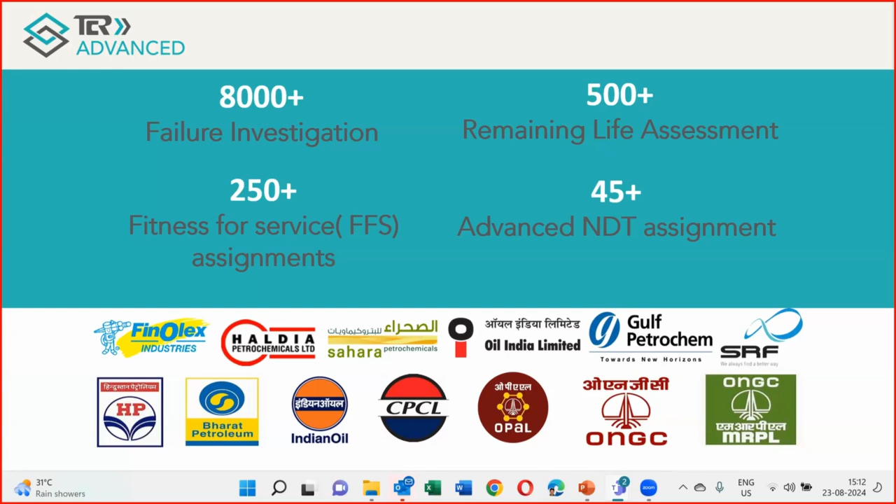Unfortunately, the RLA is more focused on the condition and what is the remaining life. But what are the points which we learn for operational aspect, which is missing in the requirement? I appeal to all the people listening to this webinar that this is a great opportunity to ensure whether your boilers have been operated properly or not, rather than only looking at cracks and thickness loss. So this is a new point we would like to highlight to industry - how an operational interface is possible to identify through investigation and testing approach.

So we can improve the reliability of the boiler through the RLA approach. We all know that profits are always linked to reliability. When your plants are not having problems, whatever time you operate, it turns into profits. It is necessary to maintain units online to be profitable, which is equally true.

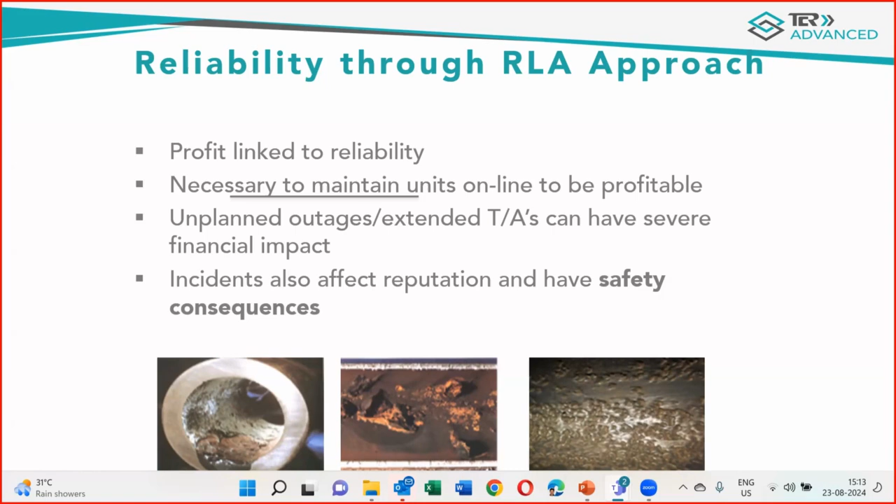Then, unplanned outages and extended turnarounds can have severe financial impact, which incidents also affect reputation and have safety consequences. So people want to avoid any untoward incidents, but these are important points which can be taken as a benefit from a proper RLA study.

So having said this, we would like to indicate that the world has gathered knowledge by learning from different incidents which have occurred. I've kept a few incidents just to set the tone of this talk. We all know that the Titanic ship failed - it struck an iceberg and a brittle failure occurred. At that time, the engineering fraternity came to know that materials become brittle at low temperature.

Similarly, tank failures, bridge failures, high temperature pipeline failures, boiler explosions are things which have put all the regulations in place in the world. So those are the things which teach the entire world.

Similarly, past incidents and records are something which we need to keep in our plant. These are the basis for improvement. Now, whenever I go to do RLA of boilers in different companies, nobody provides the past failure reports, because everybody thinks RLA is done because of compulsion and not as an opportunity.

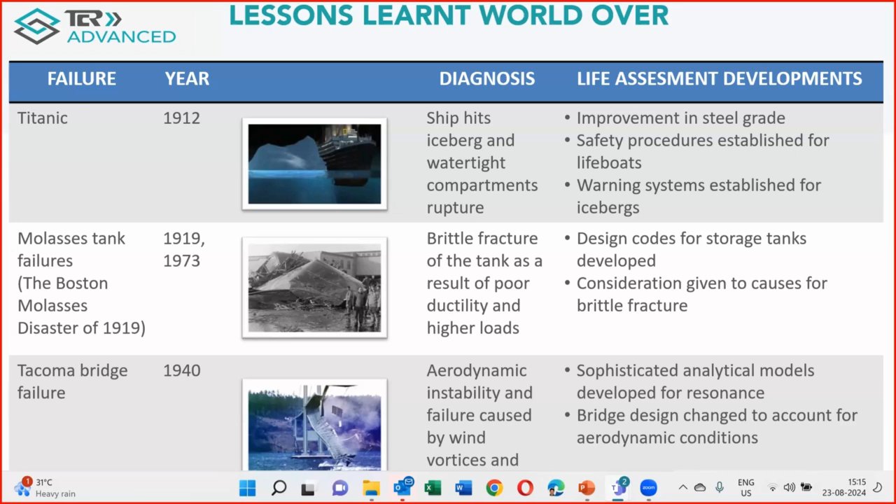When you engage any remaining life assessment agency, it is very important for you to give them all the information and data on where the boilers had problems in the past, because failures are the only thing on which the entire engineering judgment and assessments have been made for better product, better operation, and better learnings have been derived. So this is something we need to understand - when you do RLA, please provide all the necessary information.

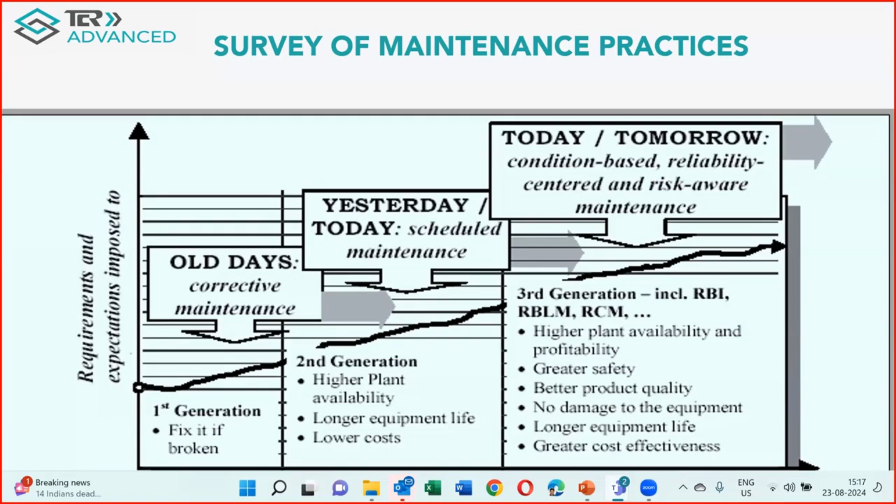Having said this, we need to have a database as the key factor. If you feel your boiler has a unique problem, the same boiler in another company may not have that problem, but yours does. So every boiler has unique operating systems, and in those conditions, the database of prior failure history becomes important. If you have analyzed any failure through a third party, those reports should be provided to all the inspection agencies. Then, what are the life limiting factors of boilers?

The life limiting factors of boilers are material defects, fabrication practices, stress, stress concentration, and stress intensity. Temperature is a huge problem in boilers because the entire design of the boiler is done based on temperature exchange, basically heat exchange. One fluid goes inside and comes out as steam, that is water, and the entire process is nothing but a temperature and pressure-wise balance.

Then you naturally have thermal and mechanical fatigue cycles, because there is flow as well as temperature fluctuation. Then there are corrosion concerns, and improper maintenance and operation inspection. These are also major aspects.

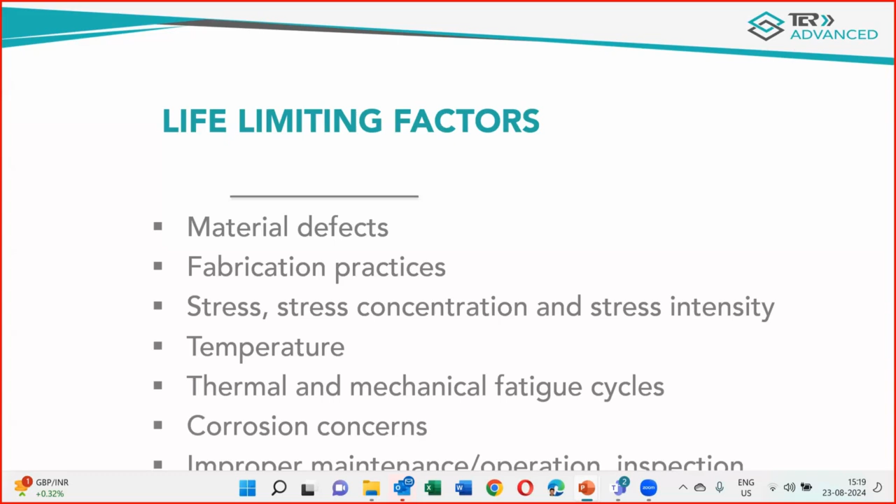So, when we say that the basis of life assessment is the problems you have faced plus the present condition of your boiler, we place a lot of importance on failure samples from the same boiler. We consider that whatever tube failure occurs in the boiler, it is an effect and not the cause. So when you identify the effect, the root cause is lying somewhere else.

So minimizing or eliminating tube failure in India, like the rest of the world, represents a significant opportunity. In fact, today we receive about 20 to 25 boiler tube failure samples a month, which clearly indicates a huge gap, because I'm sure only 5%, or maybe 2%, of tubes are coming to me for investigation from the whole country.

Having said this, there is huge potential to prevent this, and our remaining life assessment is a great opportunity to address these issues. According to EPRI, power generation through fossil fuel incurs 3% generation loss due to tube failure. India produces around 250 to 260 gigawatts of power; suppose 3%, that's about 10 gigawatts.

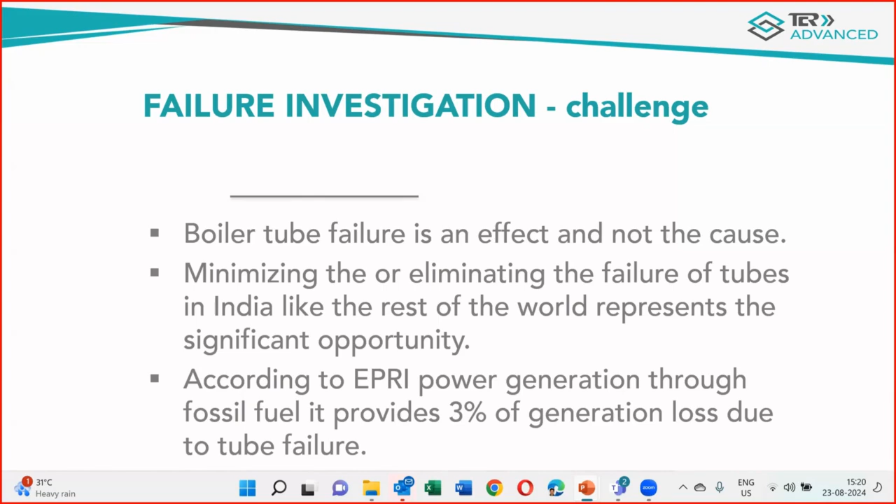Now, 10 gigawatts is what? It may be the power generation requirement of a small country anywhere in the world. That much loss we incur just because of failure. So RLA provides a great opportunity to ensure that even if we reduce this by 1% or 1.5%, we are doing a huge service to the country.

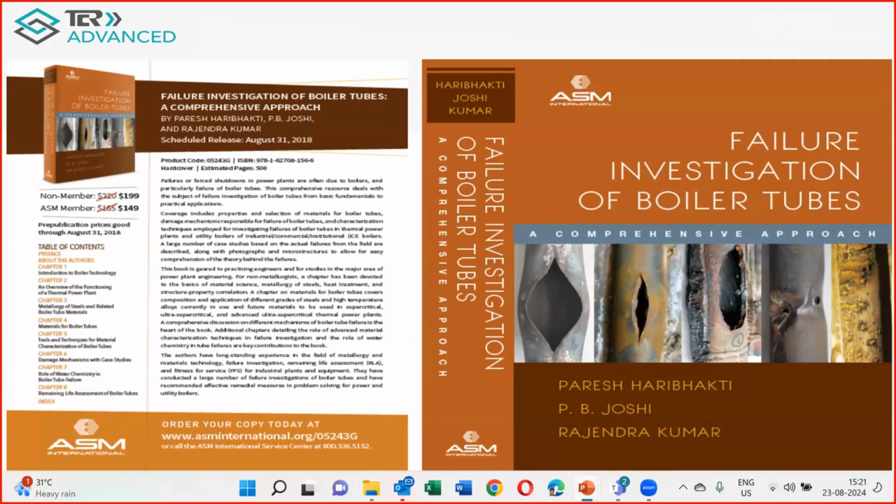TCR Advanced always believes in sharing knowledge. This is a book published by the American Society for Metals, Failure Investigation of Boiler Tubes, which has a lot of case studies and tube failure information. I recommend all boiler people go through this book, as it gives a lot of information on damage mechanisms.

Now, when we talk about damage mechanisms, it is said that in a boiler there are 36 damage mechanisms which are operating. Now, boiler RLA guidelines provided.

Can I request you to put on mute, sir? Thank you. Sir, you're in mute mode. Sir, you're in mute mode. Okay, let me check. Okay, am I audible now? Yes, sir, yeah.

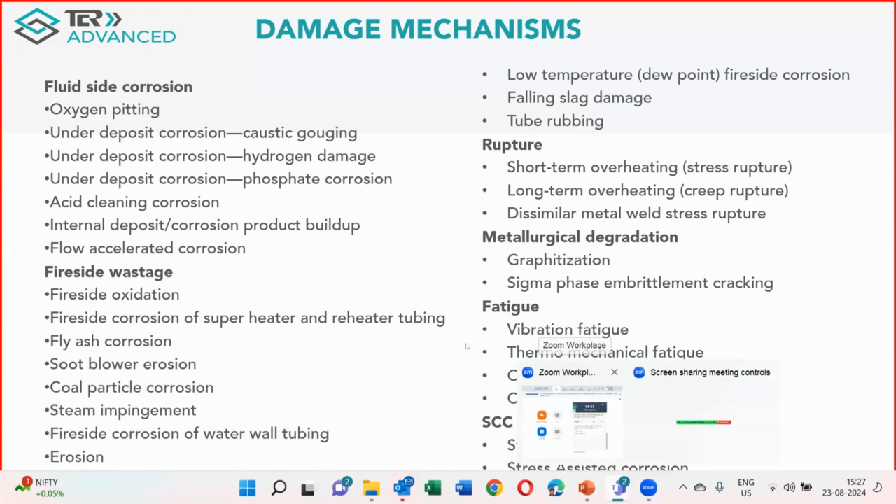Now this is a very important aspect. You need to understand four parameters to understand the entire boiler. One is basically stress - the design of the entire boiler is done based on stress. The other is temperature. The other is corrosion, for which you do all the water treatment.

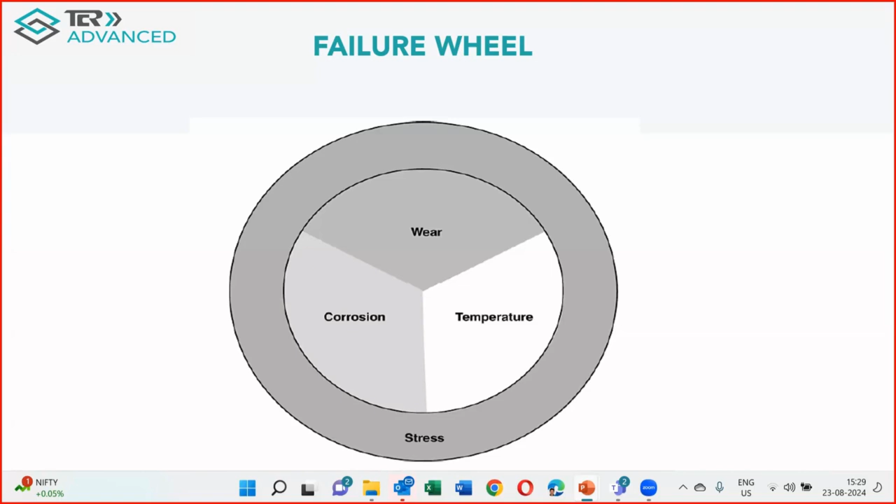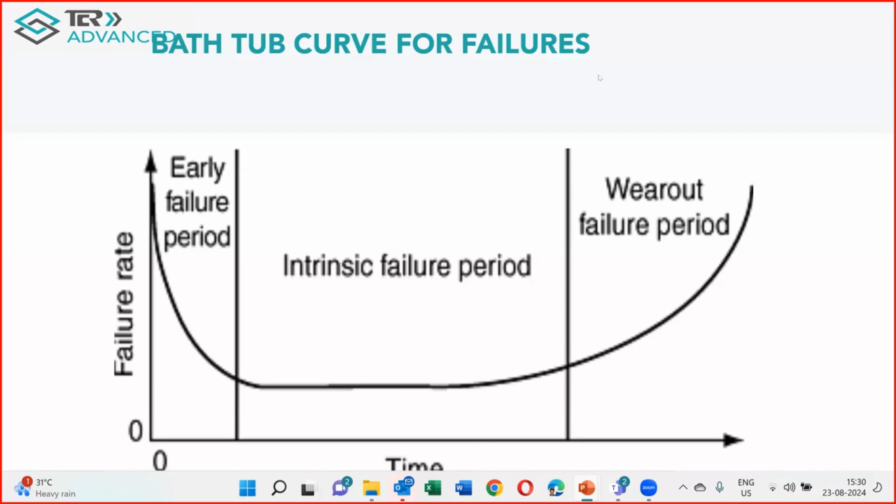Now this magnetite layer is important to understand. In India, we have not looked inside the magnetite layer. I'm very keen to do the characterization of this scale, which has started being done at one or two major industries in the country, but we have not characterized this scale in general. This scale gives you all the information - like blood reports give the history of a person's lifestyle and behavior, if the oxide layers are properly analyzed, they can tell you whether your boiler was operated properly or not.

Even if I ask you, the boilers only need 20 to 30 microns to protect against corrosion. Most of the time we operate our boilers above 100 microns, maybe 100 to 150 microns - in fact, 200 microns is considered normal. Believe me, when you increase the thickness of the magnetite layer, you also lose an extra 1 or 2% of fuel, because it ultimately has to do heat exchange through these layers. So it's important that we keep them in check and make sure they remain intact without problems.

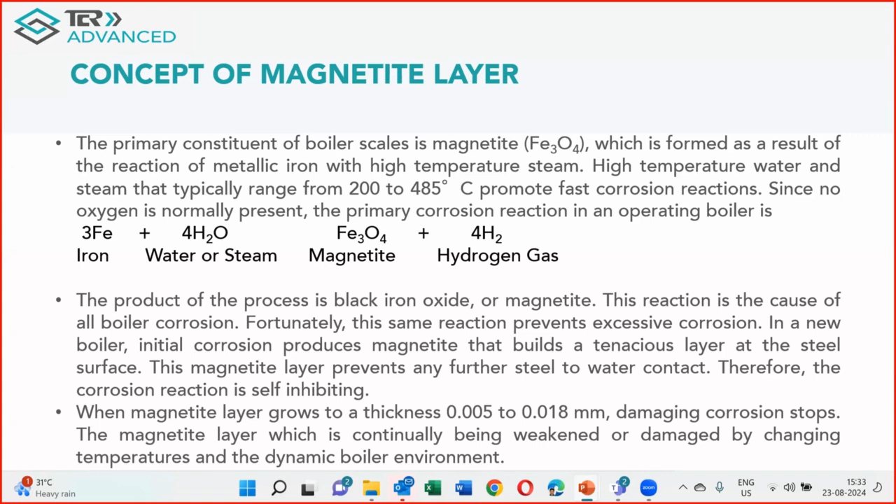We will be able to give you insights to your operations through this magnetite layer. This awareness needs to be improved, because we have been operating our plants based on past experience. Now, with new technology, it is important that we add this dimension also.

So here are examples of how thick scales can be. Sometimes when we analyze boiler tube failures, we observe about 400 to 500 micron thickness of scale. This is insane, because it gives you 3 to 4% of extra burning.

So whenever in your plant the average burning rate increases, it is important that we remove tubes from a certain sample size. If the operation or combustion is okay, then you need to put more fuel. Then it's important to analyze the tubes from certain locations, as this also reduces the life of the tube.

It is said that when tubes operate more than 10 degrees above the design skin temperature, the creep life reduces to 1/10. Now this increase in temperature further increases the scale thickness, it also increases the skin temperature, and the tube life is drastically reduced. So long-term overheating will occur and a creep failure will result.

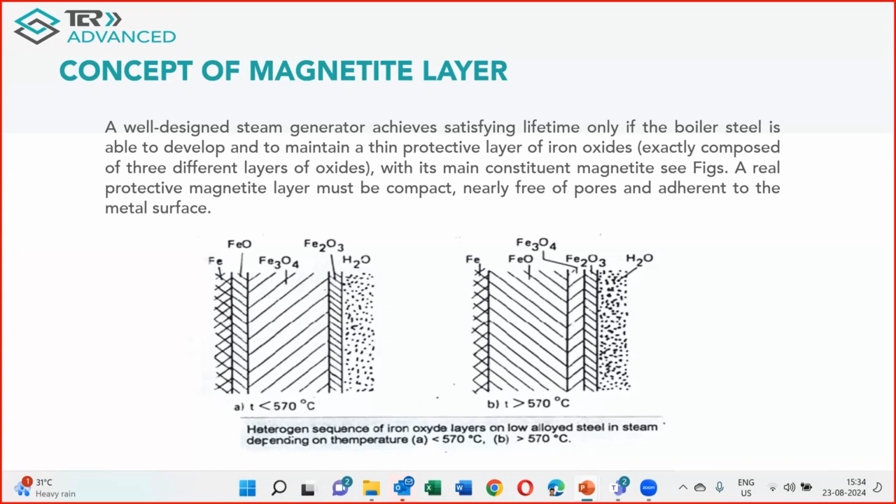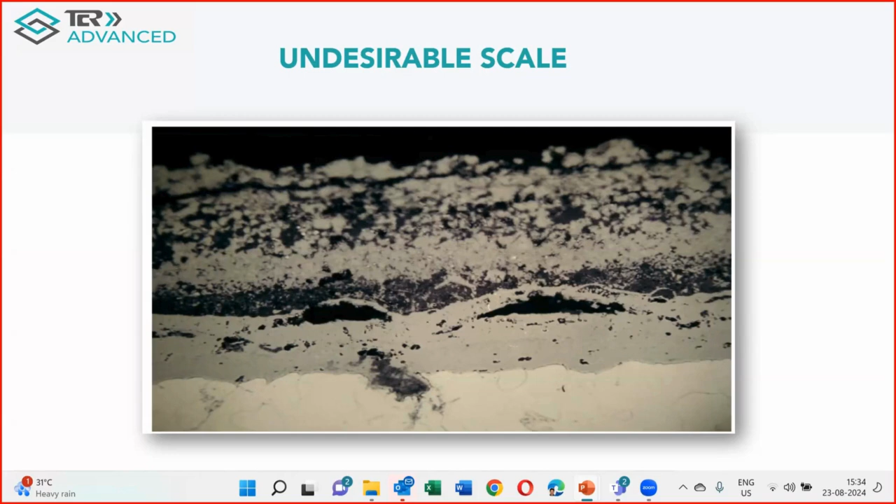A very intact layer, like the one shown at the bottom, has to be formed in the boiler. Now the theory in the subcritical boiler is different, and the theory in the supercritical boiler is different. Supercritical boilers are mostly designed for once-through operation, which means there is no steam drum in the supercritical boiler. In the supercritical boiler, the material used in most of the tubes is very high grade material.

So there, instead of a magnetite layer, you will form the chromia layer. Chromia is a chromium rich oxide layer, and this must be analyzed only on an electron microscope. It is said that any thickness above 40 to 50 microns reduces the efficiency of the boiler drastically. So characterization of these layers is very, very important.

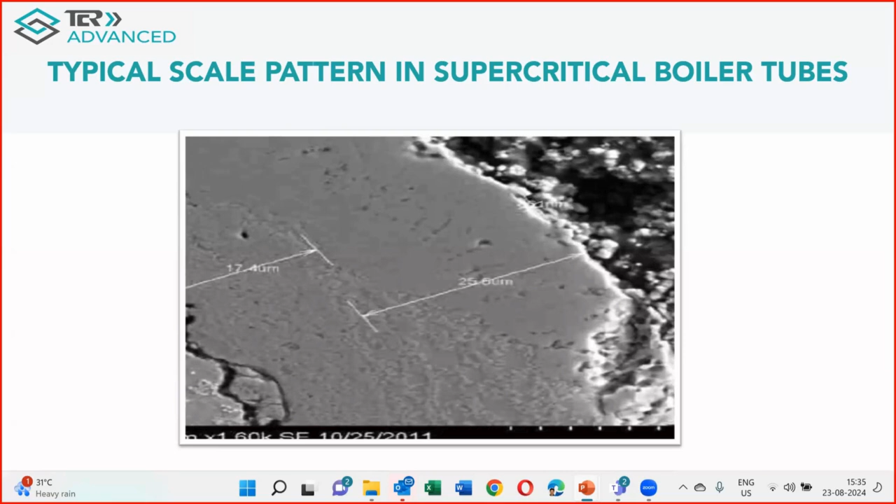We should know whether our water treatments in the past were effective, and how we can improve the intactness of the layer, because this layer is dynamic. Any disturbance in water chemistry or temperature conditions will disturb this layer, and ultimately it will result in failure, which is an effect and not the cause.

So identification of damage can be the tip of an iceberg. There are primary and secondary failures.

It is very important that when you do RLA of your boilers, we sometimes ignore condensers, because when there are problems in the water wall tubes, condenser leakages are responsible for the water wall damages. So when you do RLA of the boilers, it is important to understand the past failures and do the testing.

I recommend many times that whatever your time constraint, the best way to identify condenser leakages is through the helium leak test. Helium leak tests are the gold standard, because micron levels of leakages can be identified with them, and minor additions of water won't even be caught in conductivity measurements people do of the condensate.

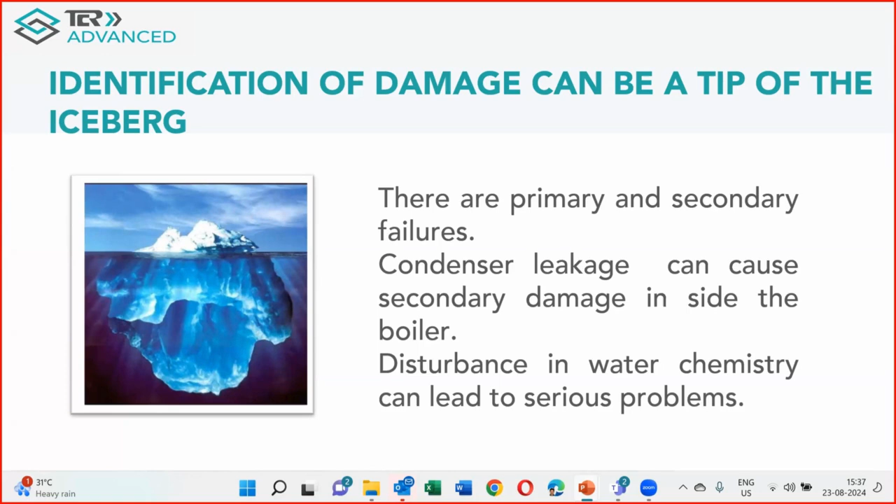So the disturbance - whenever there are problems, it gives you indications of where the problem will occur, and those need to be considered during remaining life assessment.

So what is the need for understanding RLA, rather than looking at it as a compulsion that the party is capable of doing NDT at these locations? We want to understand that most standards and codes are based on the likelihood of failure and not the consequences of the failure. What is likelihood? Likelihood has been derived based on past experience only.

So consequences of failures are economic consequences, and the other is safety consequences. So both have to be put into consideration.

For example, if I have to take a shutdown of my boiler, and the boiler tube fails, then 3 to 4 days of production is gone. I would rather invest that money into preventing one tube failure. So my inspection during shutdown will be much more stringent to ensure I can avoid failures through operational improvements.

Now, if operation people are not bought into the damage mechanisms, they will never understand the importance of the failure, and hence this kind of study has to be done as a team. So before RLA is taken, a team needs to be formed between maintenance and operation, and then discussed with the RLA service provider agency, and then you can make a wonderful approach. Basically the idea is to spend resources at the right location.

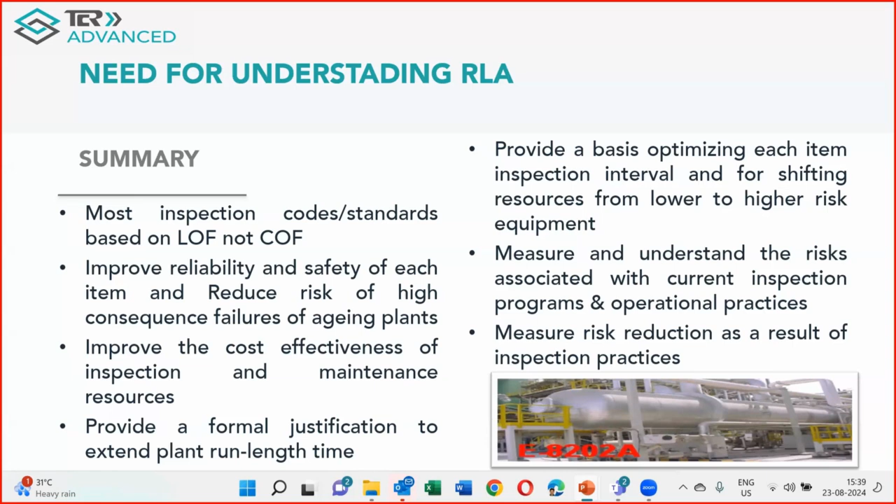Supporting this, the team study may identify that I have to do hydrogen attack checking in the water wall tubes, which is not at all a requirement in IBR. Then you can include that in RLA. So it provides a formal justification to extend plant run length time, and it provides the basis for optimizing each inspection interval. You can reduce or increase inspection based on this study. So it's important that before we take the RLA, we do a complete detailed study.

So having said this, what are the steps for remaining life assessment? They are: collection of background data and history of the boiler operation, which normally people do not provide; understanding the actual degradation mechanism, which no one gives time for, because orders are given only 8 to 10 days before RLA in most cases, and people are in a hurry to complete the job; and thorough visual examination by an expert, which is a compulsory requirement.

Dimensional measurement of critical locations, collection of scale and deposit samples and their analysis, detailed thickness survey and mapping, internal oxide scale measurement which is also important, WFMPI of the weld joints, in situ metallography, in situ hardness, then suggestions on immediate repairing, and calculation and judgment for the life assessment analysis. This is basically the steps of RLA.

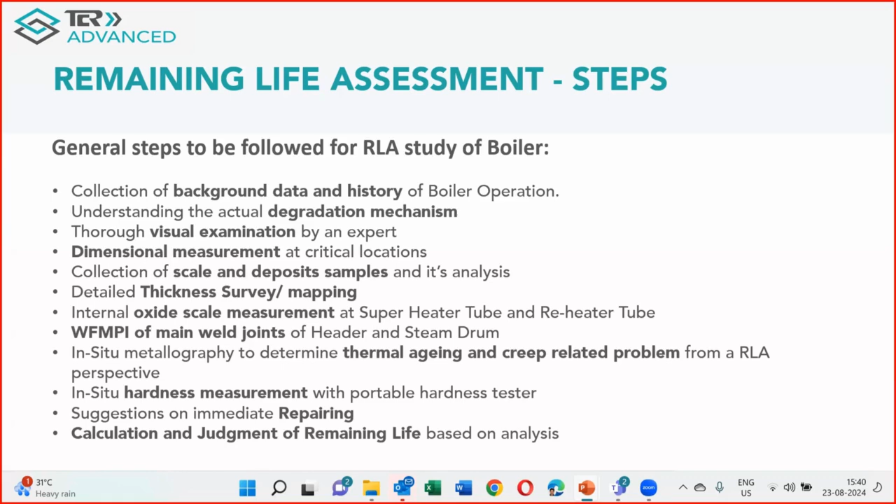If this is followed by considering these as an opportunity, the entire exercise will give a fruitful result. Now I want everyone to understand that people think when we have done NDT, we are certifying the component, but it is important to know that every NDT has a limitation.

For example, dye penetration testing is only possible on the surface; bulk defects cannot be identified. MPI is only surface and up to 2mm. UT covers most materials, but it is most important to note it can be operator dependent and prone to defect sizing error.

Now, I am very happy to say that in India, our inspection departments all over the country have gained a lot of knowledge, so UT is, I consider, done in the right manner. Radiography has an issue where most of the time the work is done at night, and different orientation and size limitations are again a problem.

ECT is again operator dependent. Potential drop again has limited accuracy and reliability is less. Replication is highly operator dependent and needs independent interpretation expertise. This is very important to understand, that most people come with replica testing. I recommend interviewing them, because it's important.

This is most important - based on these, the life assessments are made. I'm disturbed to see that when I reviewed reports in the past, people had written wrong interpretations in the report itself, and photographs were taken not from the right components because they did not match the material. So as an owner of the equipment, you must interview whoever comes to do the RLA to ensure it's done perfectly.

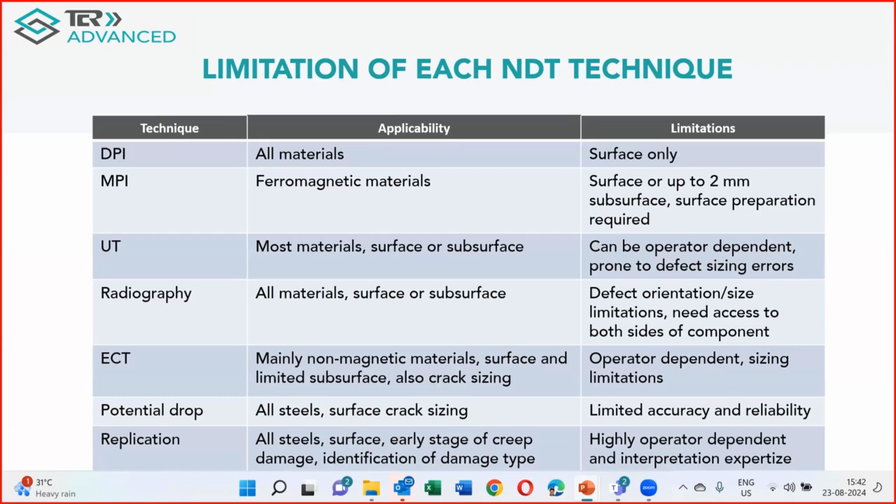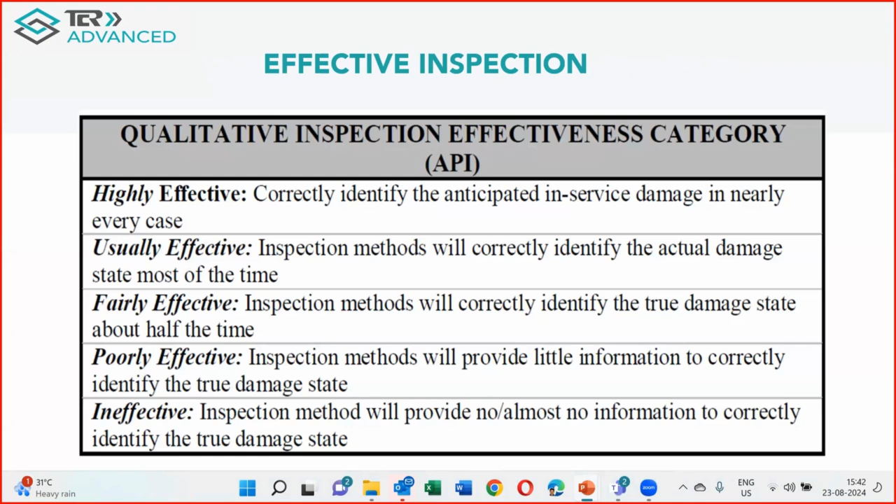So basically you can identify as per category. American Petroleum Institute has given a good guideline; we can take a leaf out of their book for our boilers, that our inspection methods are highly effective, usually effective, fairly effective, poorly effective, or ineffective. When you start questioning your methods this way, it gives you a great idea of how to improve the assessments through inspection.

But there are certain damage mechanisms that need to be understood - in remaining life assessment in boilers, creep damage occurs in superheaters, superheaters headers, reheater headers, desuperheater nozzles, and steam lines, and thermal fatigue will occur in almost all components. Hydrogen embrittlement will occur in water wall tubes.

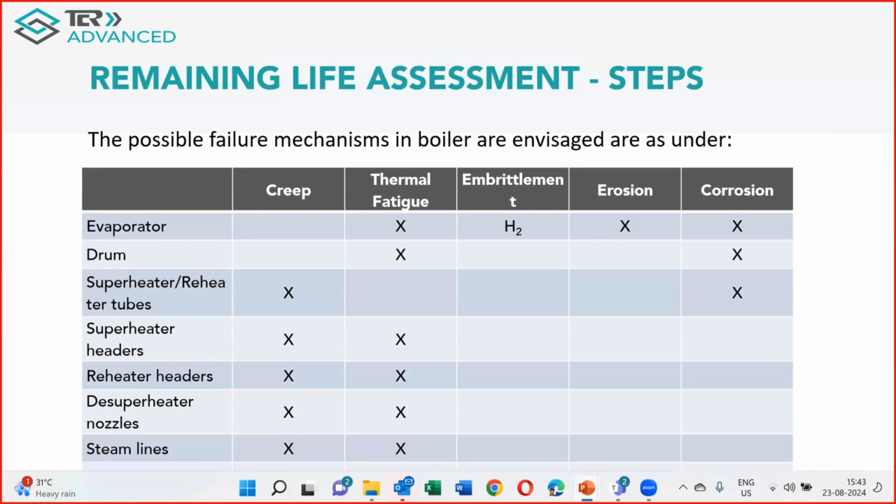Erosion and corrosion will occur at the water circuit area. The methodology depends on how the damage will come to be known. When you have a creep, most of the time I have found that some choking is there in the header, or secondary combustion is occurring in the boiler. But it is seen by swelling of the tube, diameters are increased.

So you can do certain NDT techniques. For fatigue, you have to do all the NDTs which are possible to identify the crack. Corrosion fatigue locations need to be identified based on the history of the failure. Then you have corrosion related failures, high temperature corrosion and thickness loss.

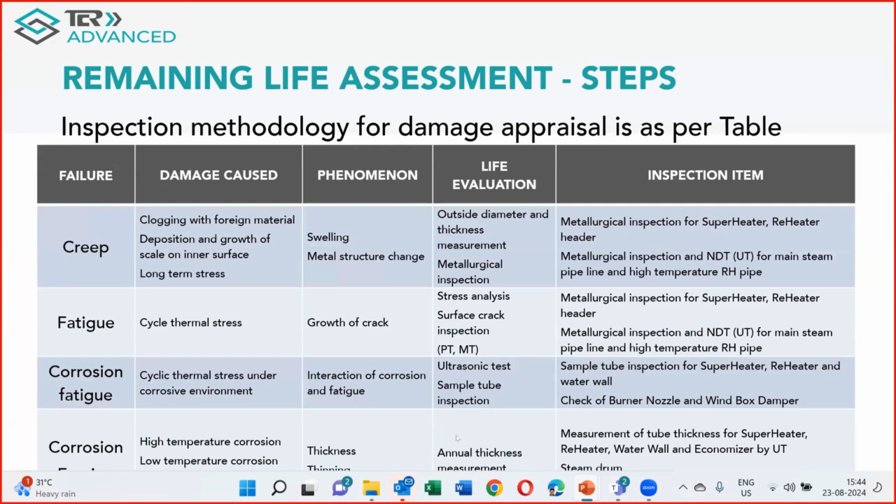So you have to do measurements of the thickness. But thickness measurement is not the only answer to all your problems. Consider it as a defense mechanism tool rather than certifying the boiler. So when I say defense mechanism tool, I mean you have to concentrate thickness measurement more in the area where chances of thickness reduction are more. There are different data which will come out as a study of RLA.

So what is corrosion? Corrosion is the gradual degradation of the material due to chemical reaction with the environment, such as oxidation, sulfidation, in boiler tubes. It happens in the boiler tubes. So basically, overall thickness loss occurs.

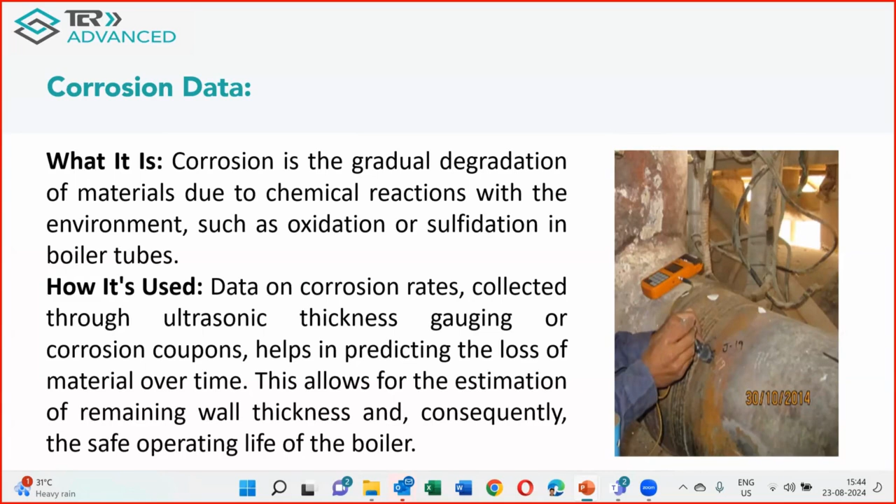But what about the loss of thickness which occurs localized? This is very dangerous, so it also is called corrosion. Design is done for this general corrosion and not localized corrosion. This is something, the data interpretation which we need to understand. And extensive thickness survey is the only answer to identify this issue.

Then, for identifying corrosion, you can have boroscopic analysis, videoscopic analysis. I am extremely proud to say that TCR has more than 16 boroscope equipment. We supply to many industries. It's not only for corrosion, but it can help you in many, many aspects. For boiler RLA, we conduct this in the header to identify whether any objects are there or not.

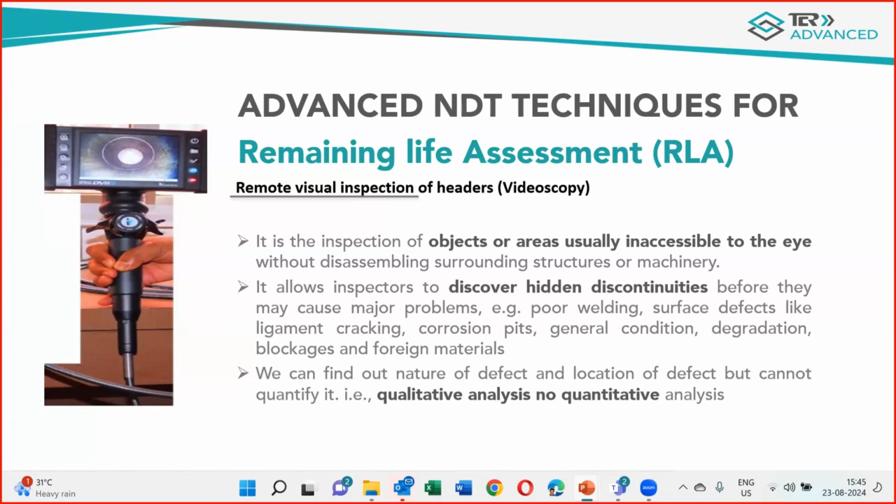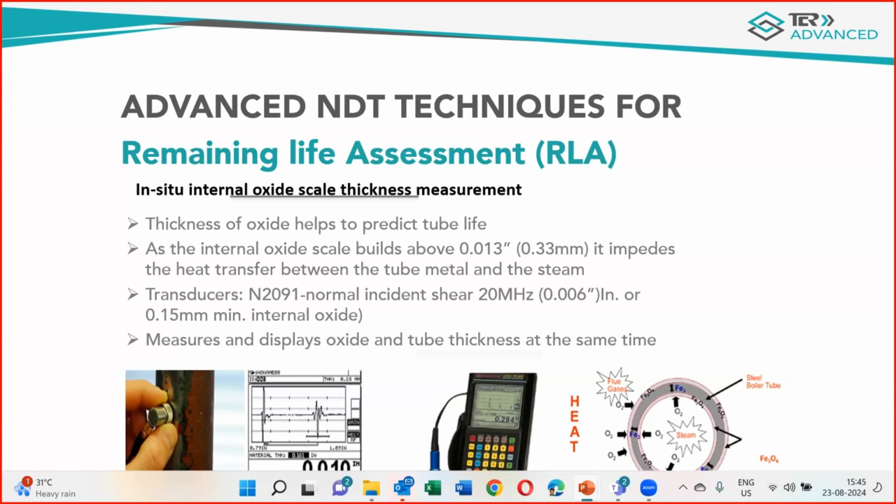And we have 6 such equipment, which we supply for a lot of services. Then, fatigue data. Fatigue occurs when load cycle changes. And in today's time, you all know that because of renewable energy sources, there is a lot of fluctuation in demand for the power plants. So they are operating the boilers at different loads.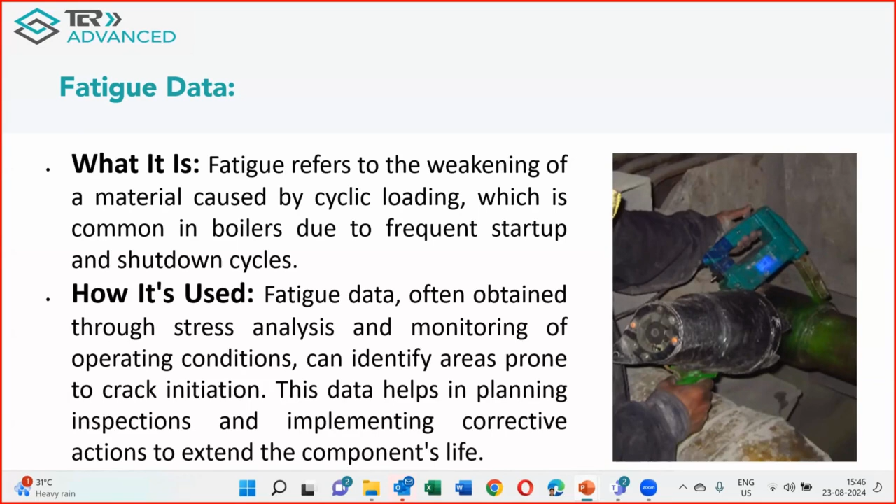Trust me, I have started getting a lot of failures because of corrosion fatigue, because of stress assisted cracking, because of flow accelerated corrosion. These are the issues, the side effects of the boiler tubes. So once we know that this kind of failure has started occurring, we can devise it in such a way that if RLA is coinciding, we can do a thorough analysis and identify and replace those areas which can create problems. So use the RLA as an opportunity. That's the message which I want to give through this talk.

Then, we have advanced techniques like time of flight diffraction, where the thicker welds are there, we can identify - this is a very sensitive technique. When it came, it was told that it will replace radiography. But today it is used quite extensively in many cases where you can do the testing in daytime where other works are not hampered.

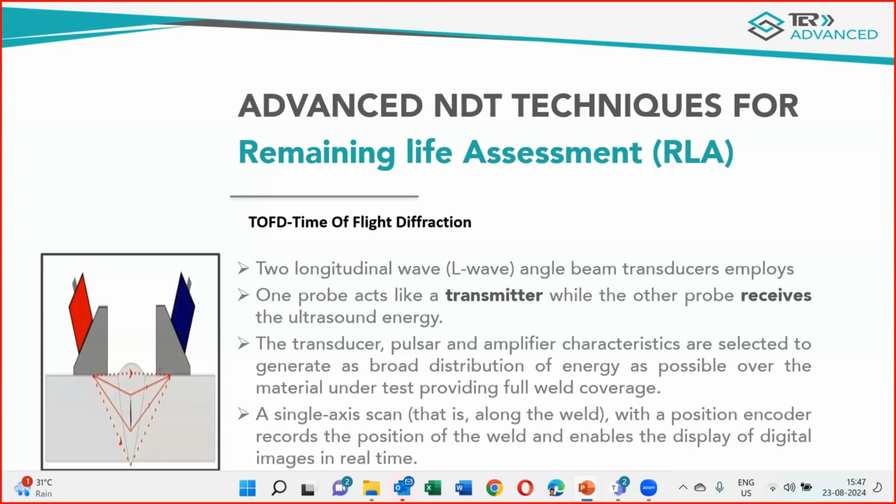Then we have the other technique called phased array ultrasonic testing. This is quite useful in identifying the issues with the tube-to-tube weld joints. PAUT - we have the bracelet probe, and these bracelet probes are put around the weld joint, and the entire joint can be configured. TCR has identified issues at many companies.

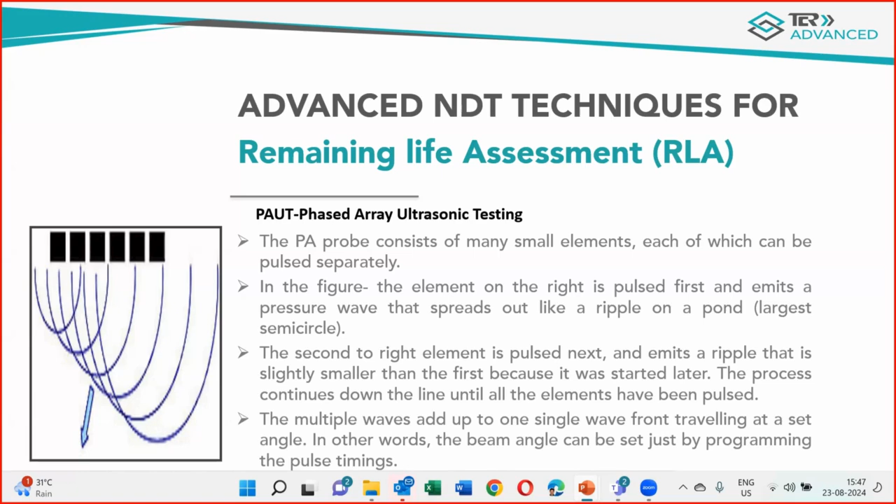Unfortunately, testing is considered as a labor job these days, so we lose a lot of jobs because of those aspects. But whenever there is a problem, people don't worry about the charges, and they call on us. We have all standard samples available with us, which can identify through phased array ultrasonic testing.

Then you have low frequency eddy current testing, which is also used in boiler tubes assessment. Then you have the HTHA problem. Now, I'm extremely happy to tell you that TCR Advance has developed methods to identify the early detection of high temperature hydrogen attack from the boiler tubes.

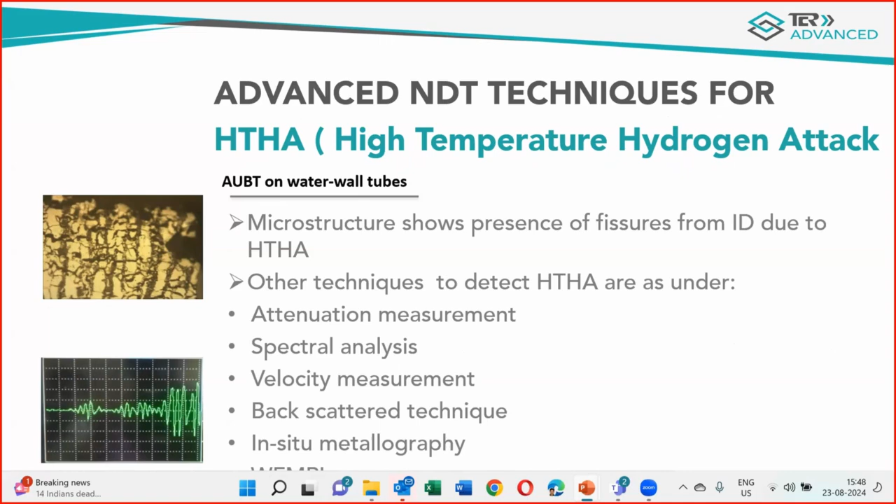Once in 10 years, I recommend all boilers be checked for HTHA initiation, because when it happens, it happens in a very serious manner. So in RLA, I recommend this be included, with certain sampling areas studied for at least 3 to 4 days on water wall tubes for high temperature hydrogen attack damage.

The base and heart of the entire boiler study is to find out the creep damage, because the boiler life assessment is designed for a certain lakh hours as per the design information. But the boiler can run for more than 50, 60 years because you never touch the design parameters, and if the material and workmanship is good, you can extend the life.

Creep is the slow deformation of the material used at high temperature and pressure over time, and creep damage is a common concern, particularly in high temperature zones. You can measure creep by diameter, and you can do in situ metallography, which is the major area. In fact, IBR also depends on in situ metallography, and you can identify the actual aspect.

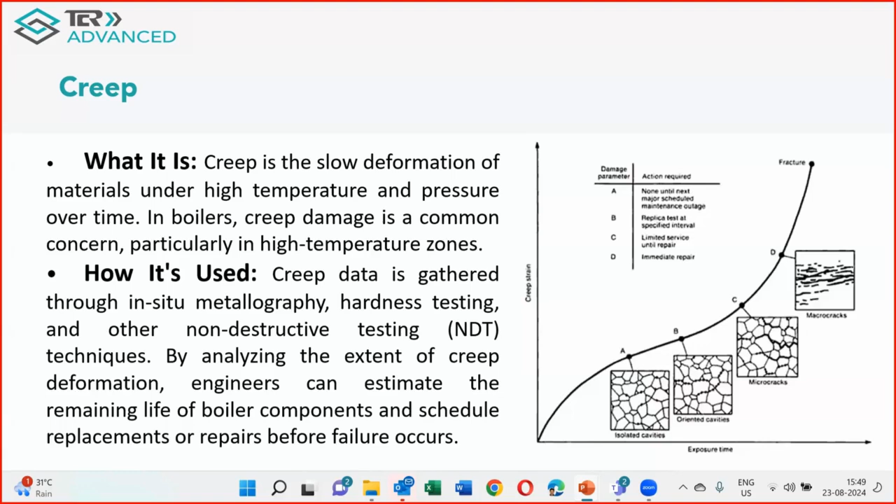For compositions with two chrome material and below, when the first creep cavity occurs, we can say 40 to 50% of life is expended. But if you have 9 chrome material, very few information is available on this alloy - when the first creep cavity comes, 70% of the life is consumed. So it depends on the agencies with which you get the life assessment done, which is very important.

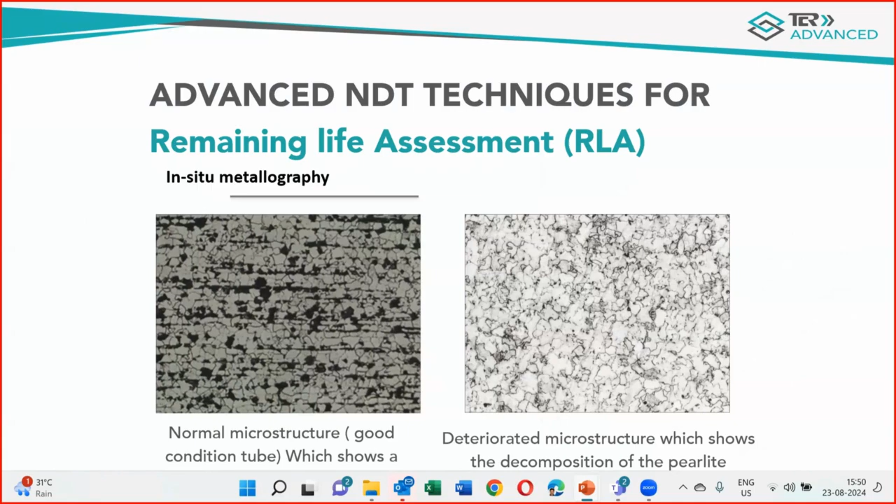There are in situ metallography photographs where intact microstructure and degraded structure are kept side by side. We can estimate the temperature from the microstructure also. This is an electron microscopy image where the black spot on the right side shows the creep cavities and damage - these are the charts.

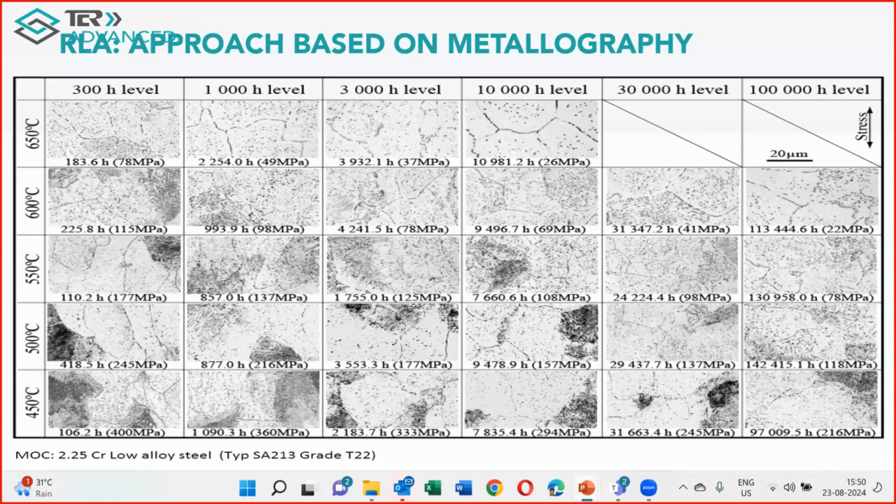You can identify the microstructure and temperature control. When you do periodic metallography on your plants, you can find out whether they are operated in the right manner or not. A very important aspect is checking all the pressure and temperature trends in the past, which I think no RLA agency is doing, or people have no knowledge to do it - this gives you a lot of information.

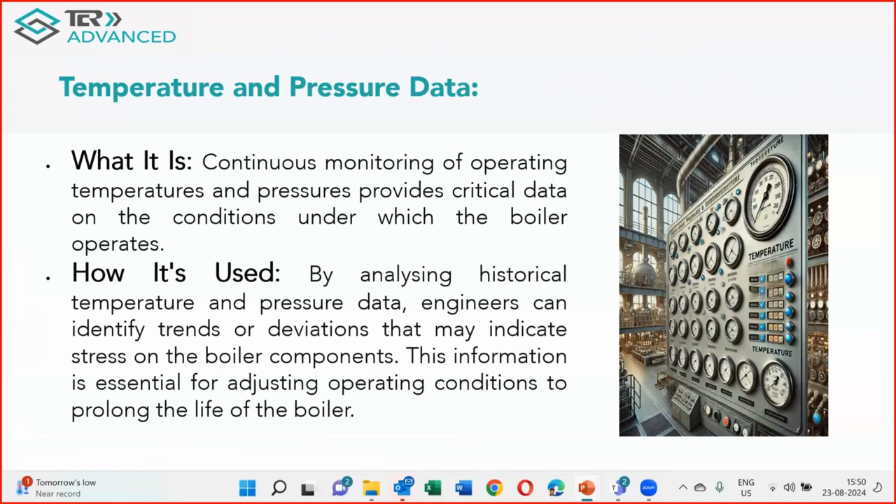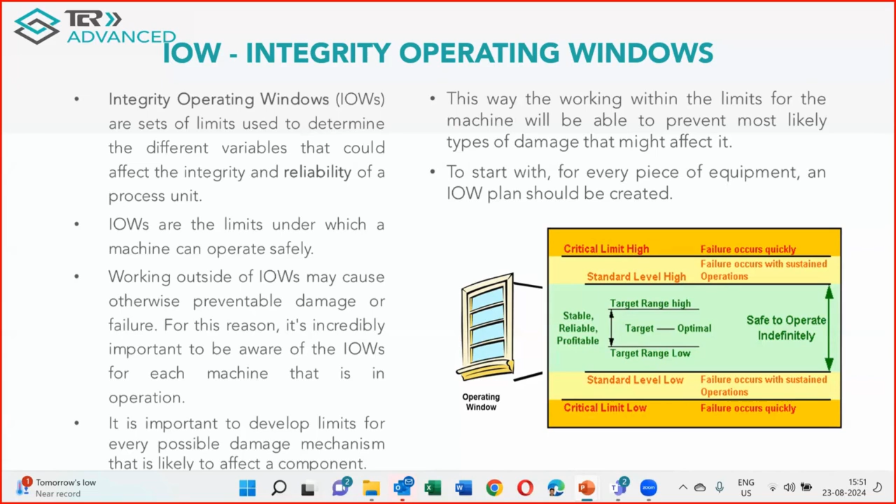These kinds of studies need to be done before RLA work. Then you can decide the integrity operating window, where you can identify the temperature window, pressure window, and also put restrictions on combustion, impurities, and water treatment limits. When you do this window with AI technology, you can set the trigger.

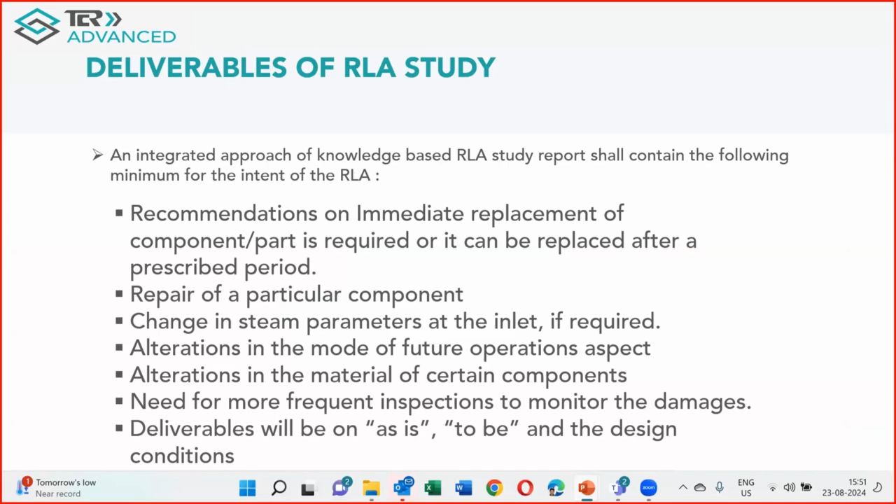Once you do that, the entire RLA has to be provided with proper recommendations - immediate replacement of components if any repair is needed, change in steam parameters at the inlet if required, alteration in the mode of future operation, alteration in the material of certain components, need for more frequent inspection to monitor damages. Deliverables will bring it as close as possible to the design conditions - this is very, very important.

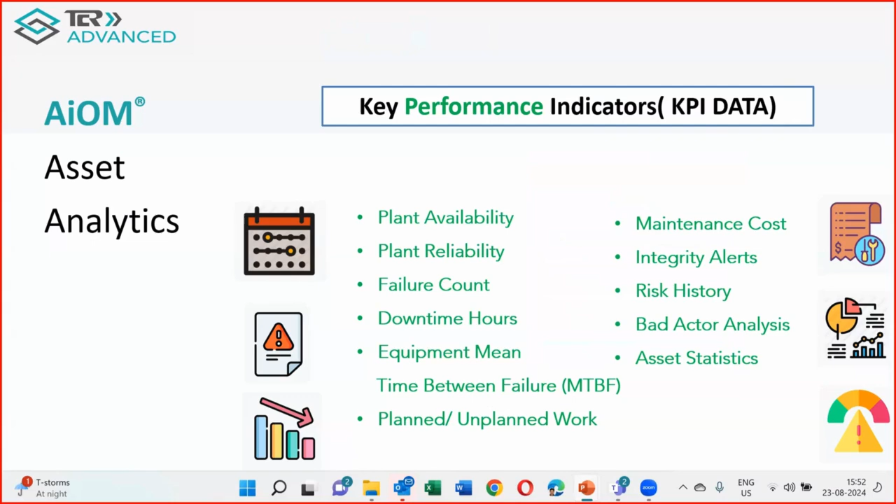Once you do the effective utilization of NDT, that's the opportunity we should pursue. Our prime objective is to help companies achieve overall integrity, reliability, safety, optimization, and maintenance excellence. So TCR has come out with the asset integrity optimization and management tool - not only for boilers, but boilers can be part of this. You can characterize different damages, different inspection techniques, and monitor the entire aspect with a lot of benefits using AI and digital technology, finding different parameters and analytics so you can take the right decisions.

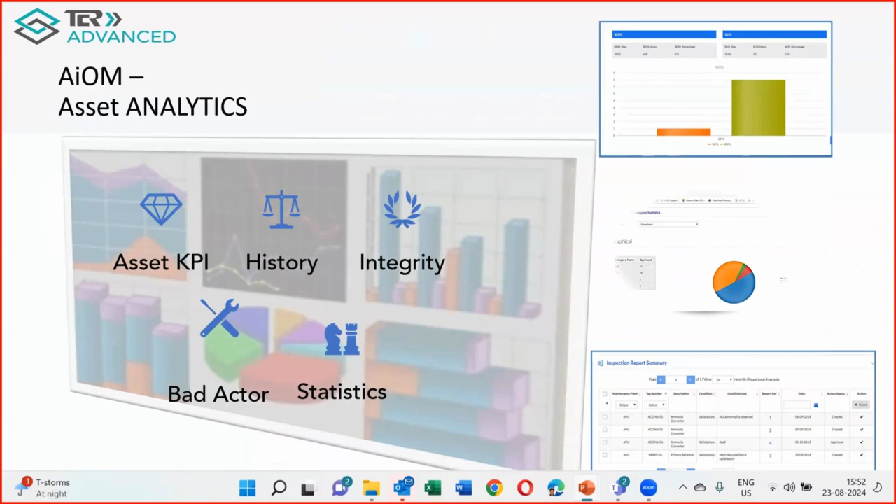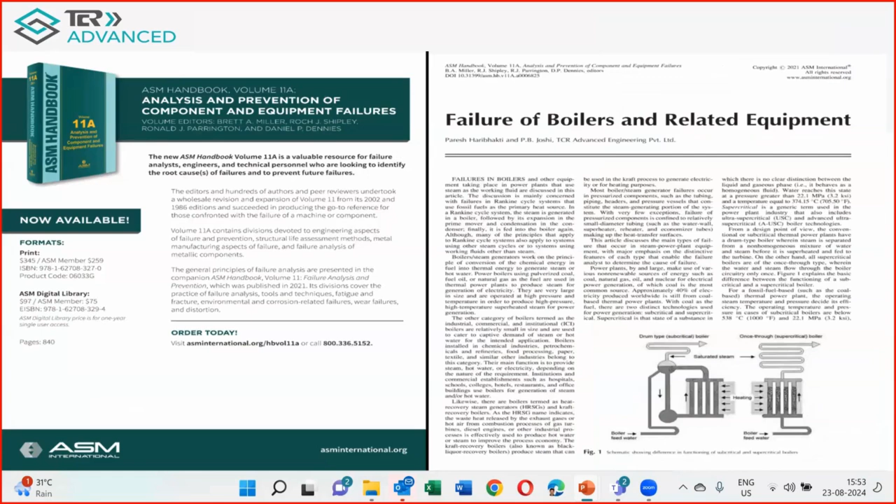Use the IBR guidelines as an opportunity, and do a very intense RLA.